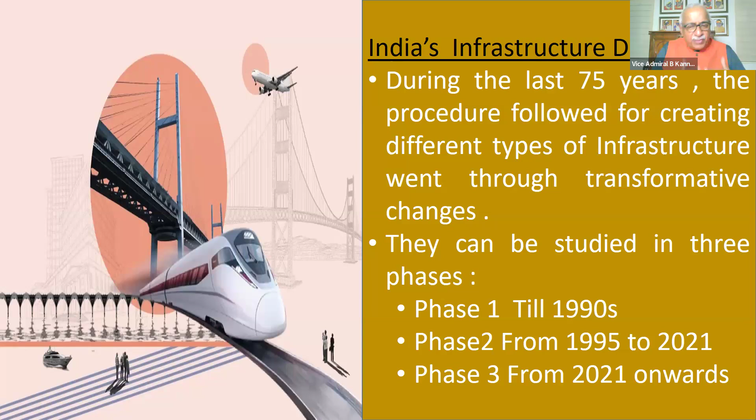So let us look at phase 1. In phase 1, the planning and execution was by the parent ministry.

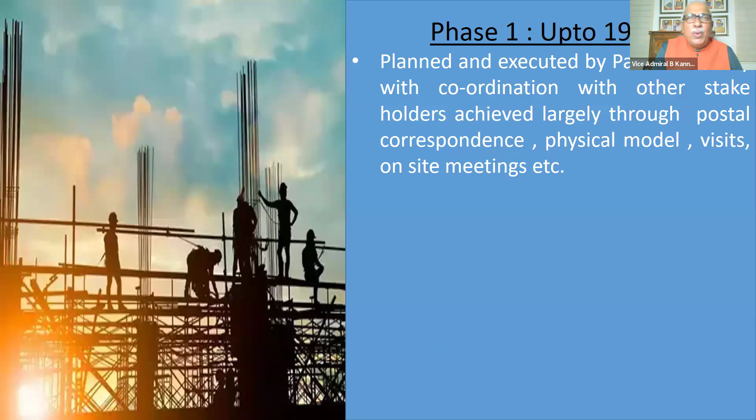If you are looking at, let's say, an energy plant or a thermal power plant that has to be created, it was always done by the Ministry of Power along with associated stakeholders. All the exchange, project progress, project updates, and even various clarifications were largely through postal correspondence. Physical models were made to explain what was going to be created, and people used to go to the site and take meetings. The technology of those days, before the mid-90s, did not permit fast interaction between the project site management and the main ministry running it. It had its own inertia, not because of the people, but because the system did not permit fast execution.

This disadvantage often led to delays in execution of projects, because you'd be seeking a clarification, maybe design related. Very often for design, you'd approach a foreign consultant, write to him, and his reply comes saying he will visit the place and then clarify. So delays kept accumulating in this era of infrastructure, and therefore there was time overrun. And when you have time overrun, automatically you'll have cost overrun.

As I told you, design talent was also limited in the country in most sectors, so we had to take help from foreign countries, foreign nationals, or foreign laboratories to help us with infrastructure design. So in this phase one, we had a centralized way of control, but the control was subject to a lot of delays because technology was not really supporting speedy exchange of information and clarifications, and therefore it largely depended upon visits of people coming all the way to the site to give clarification.

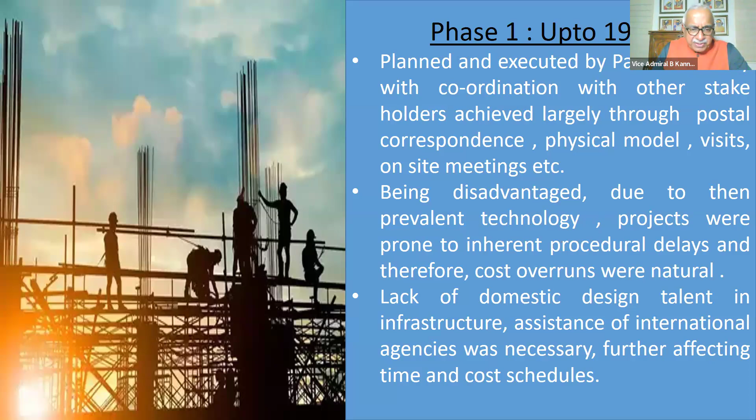Let us look at phase two, between 1995 and 2021. During this period there was a change. The government formed a new department called DPIIT. They said for promotion of industry, and because industry is going to promote manufacturing mostly, there'll be new goods, then internal trade will also flourish.

They created a department for promotion of industry and internal trade, which looked at, let's say, we were importing a particular commodity from abroad, such as a medicine, and we want to look at how we can make this medicine in the country. We'll study whether raw materials are available, facilities available, any new technology required, and then decide to create a facility in India, whether it's a public facility in a PSU or a private facility jointly - though in those days joint public-private was not there much - or give some loan to a private company to create a facility.

This DPIIT used to form clusters of various groups, be it for power generation, pharmaceuticals, agriculture, electronics, etc., and examined whether any new technologies were emerging and how they could have a balance between industry and trade. If your industries are going to make goods, they have to get sold, either exported or domestic. So they also used to assess whether there is a demand for an item, and if you make it, how will you consume it within the country or export it. Along with that, they also looked at what quality level of production would take place so that the goods meet export standards and also create demand within the country.

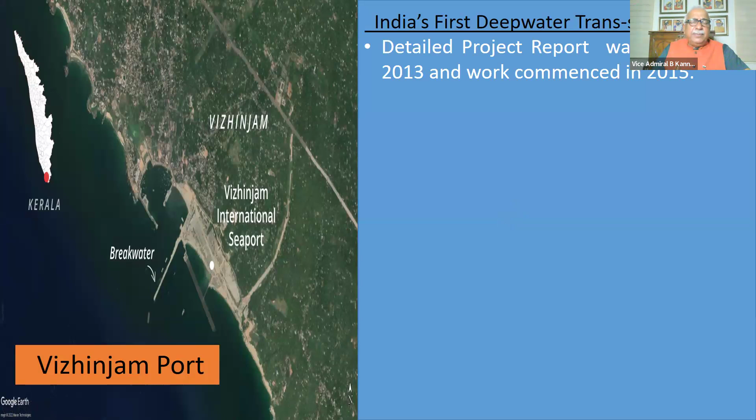This Vizhinjam Port has already started functioning from last year onwards. Its project report was prepared in 2013 and work commenced in 2015. About 20,000 crores are going to be invested in this. At the moment, only 11,000 or 11,500 crores have been invested. But more investment is going to come between the Kerala government and the contractor Adani, who will set up a full-fledged port in 4 phases. Phase 1 is over, and therefore functioning has started.

They will complete phases 2, 3, 4, and create a Vizhinjam International Seaport, which will be owned by the Kerala government but operated by Adani. This model is called the landlord model. Kerala government, which would have invested close to 9,500 crores at that time, will allow Adani Port to operate, and the profit made will be partly given to the state government, which will be the inflow for the state government. So this is the contract which has been finalized, and work is progressing.

While we set up the port, two important things came to notice. The road connectivity to the port was missed out, and the rail connectivity of the port has not got ready. Now it is expected by 2028. So for 4 years, because the port started in '24, till 2028, road and rail connectivity will be poor. There will be some small road, but a road which can take the type of incoming cargo as well as various goods for export will find it difficult to handle the scale of goods which are to move.

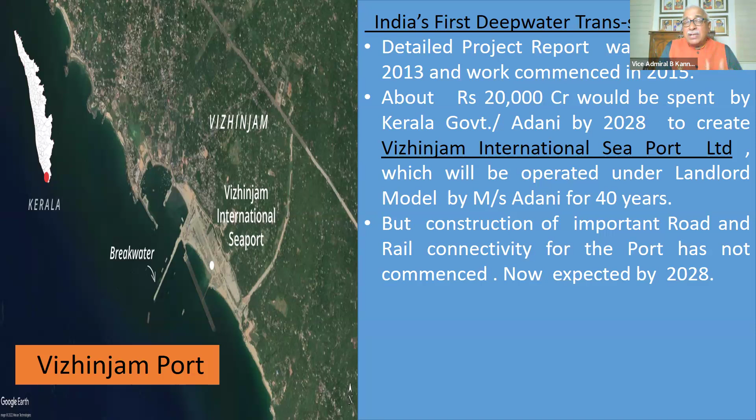We can go into details during the question and answer session. But it has impinged upon efficient functioning of the port, which was expected to take away a lot of business from Colombo, Dubai, and even Singapore, because Vizhinjam is very close to the international shipping lane. Now that is going to take some time to happen because of this handicap which we have.

But what I want to highlight is, how was this project monitored? What model was followed? How did they miss out this issue? Maybe it came to public notice very late, but the fact is many other things got finalized without taking first mile and last mile connectivity into account. Some other road got built, but that road was very far away from the port. The railway line, which has to get connected to this, has to be a tunnel to come to the port. So there are many issues pertaining to rail connectivity and road connectivity.

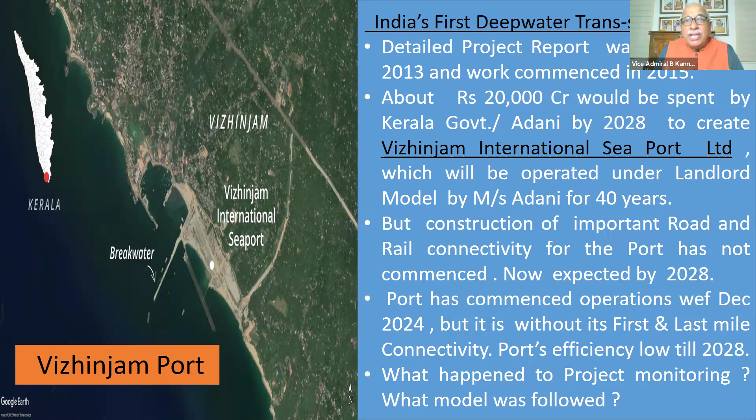This is an example of how an infrastructure project, which was very well conceived and much talked about, finally resulted in a suboptimal efficient infrastructure. It is still not there. It will take another 4 years more. We'll discuss more during Q&A.

So now I come to the last phase, phase 3, which started on 15th of August, 2021. The Prime Minister announced Gati Shakti on 15th of August during his Independence Day speech, saying we are going to have a new digital portal which will enable our infrastructure to be planned and executed well. The cabinet approved it on 21st October, a few months later. This Gati Shakti portal was expected to give seamless and efficient connectivity for movement of people, goods, and services. How that will happen, I will explain as we go along.

It minimized duplication in new infrastructure. At the same time, existing ones are not blocked. So they found ways and means of augmenting existing facilities. At the same time, anything which has been built, we didn't duplicate it, so that there is high utilization of whatever money you're putting in.

The logistics sector will be specifically addressed because that is critical to exports. Digital technologies will be used for planning and execution of the projects. So Gati Shakti, a digital portal, was created with these aims, most important being it will enable you to plan your infrastructure in great detail using digital technologies for planning, execution, and monitoring.

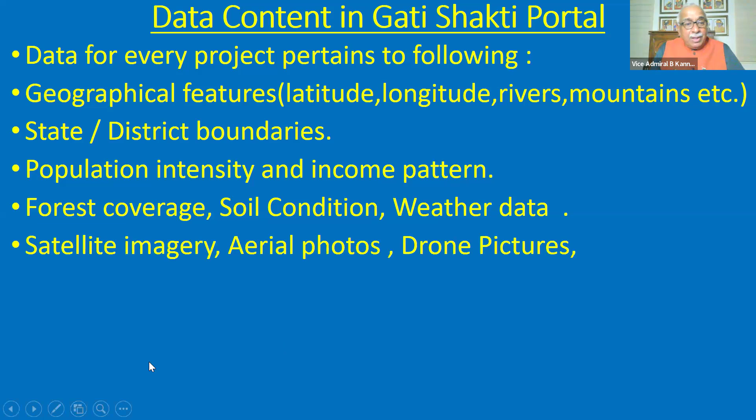It will tell you how much forest coverage is there in that particular area, what is the soil condition, is it subject to any sort of erosion from rivers, what is the weather data - is it having too much rain or very little rain? What is the satellite imagery of that place over the years, how it has changed? What are the aerial photographs which have been taken? Drone pictures - all these are data.

So for every project - let us say you're going to start a medical college in a particular area, maybe with a hospital also - then all these details are available to you in the form of data: satellite imagery, aerial photos, drone pictures. What is the location of post offices in that area, hospitals, schools, hostels, tourist spots - all these are available in the map.

And they are not in one map. They are different maps - there's one map for population density, another for satellite imagery, a third for aerial photo, a fourth on drone pictures, but they can be superimposed on one another. I'll show you an example.

And what are the natural disasters which have taken place before, and what are the management centers for disaster. So various types of data are collected, and this data is collected in geo information, geographical information as it exists on Earth, latitude, longitude. It is seen with respect to latitude, longitude, and maps are prepared in layers of layers.

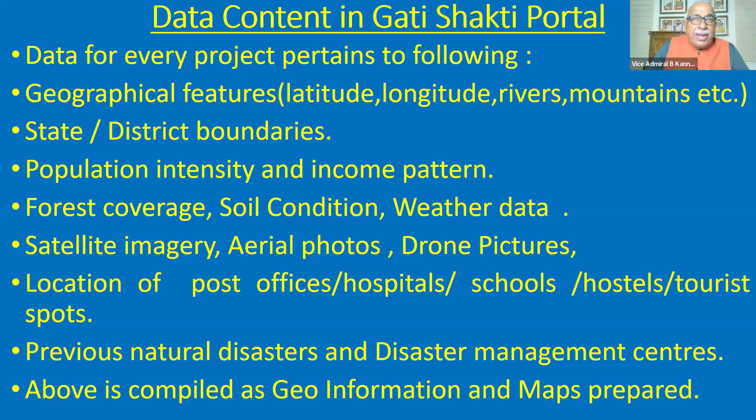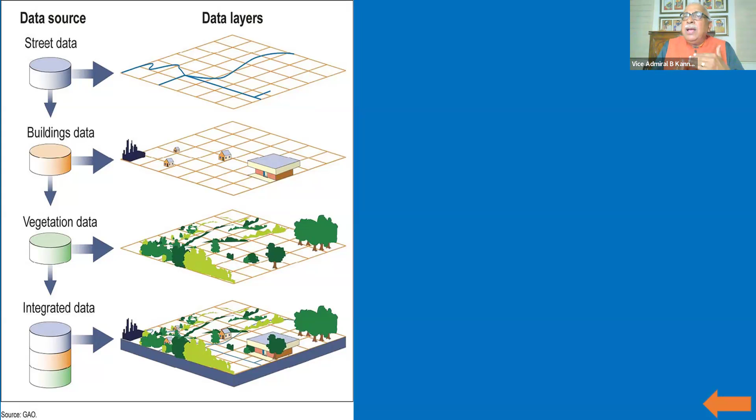So it is possible for planners to seek the various data available which they think is relevant to that particular project, and then say show this map, superimpose on this, show the next map. So they are able to visualize on the computer screen, huge computer screens, the entire layout completely in different data packages - seeing it separately and also integrated. So you're able to appreciate what is the exact impact on the ground.

So these maps are dynamic maps. They are interactive - you can ask questions to the map regarding, let us say, vegetation. How much is the forest cover in this area? How many trees will have to be cut if I have to set up the medical college and the hospital here?

The computer will straight away say, in this area, you will have to remove so many trees. Immediately, the answer will come from the map. These maps are interactive, prepared in GIS, Geo Information System. Latitude, longitude, all aspects are referred to as they exist on Earth's surface, captured either through satellite, drone, aerial photography, or from existing maps. Everything is available at the click of a button on your computer.

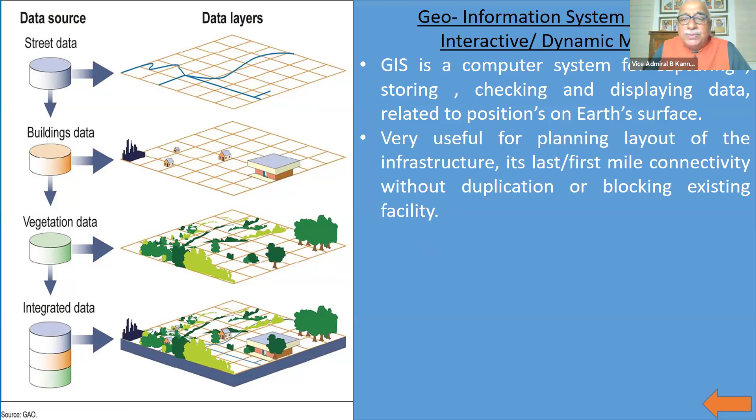So you're able to check it and verify it, and decide a layout of the infrastructure much faster than when you work only with maps on paper. You're able to do a better layout, give more efficiency, and talk about better management of solar energy or ventilation, as well as lighting inside the building.

Should we go for a green building or not? All these things you're able to finalize, and look at what is the first mile and last mile connectivity, making the plan more realistic and appropriate to the needs of the user and the owner, which I mentioned earlier. These are two important figures in every infrastructure - user and owner. We're able to meet their requirements.

We are able to look at, let's say, a stadium - how much area will be covered, how much seating, how much parking area. We've seen so many stadiums built in the country, and when it comes to parking, you've always suffered. So you look at if the seating is going to be so much, how will the parking be, how will the entry be, how will the exit of people be, including during an emergency if evacuation is required, and what will be the arrangement for entry for players safely and separately. So you look into all these aspects when you finalize a huge stadium.

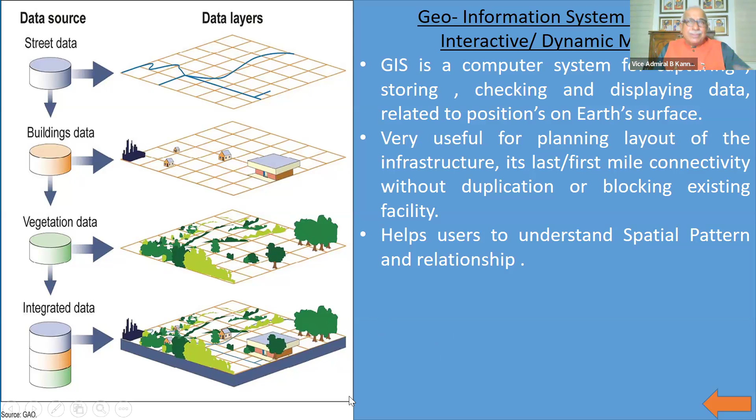And then you look at how it will be protected during rain and from the sun, etc. So I'm just giving an example of how different types of maps help if you're in the deciding team.

You can show me the map of how temperatures are in this place during summer. The map will come with different colors - if it is red, it means very hot; if it is pinkish, it is less heat, etc. The map will tell you the temperature during summer and winter, how much the rainfall is, and the layout of the roads. One has to see GIS maps where you can superimpose one on another.

An important aspect is that the symbology has been kept the same in all the maps. That means if you are depicting a road, it'll be a particular color. If the road is 4-lane, it will have a particular indication; if it is 6-lane, another indication. The color and symbols used will be the same throughout all the maps so that the viewer doesn't get confused.

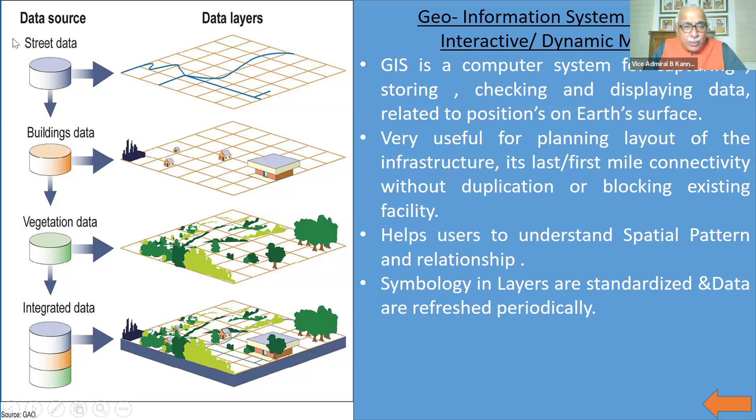Now I'll tell you how many layers of maps there are. I've shown you 1, 2, 3 and integrated. 1,685 data layers have been created with the help of various ministries, various institutions, ISRO, defense for aerial photography, and so many other institutions.

1,685 data layers have been created in Gati Shakti, out of which - I'm sorry - 720 odd has come from central government, and 950 has come from state governments and union territories. State governments had a lot of information on regular paper maps, which may have been scanned, but now they have been brought into a common symbology, common GIS, and uploaded on Gati Shakti. So when you look at a particular site within India, the data from the state is already there in the memory, along with data from the central government and various ministries, allowing you to create a very holistic picture from all the data.

All 1,600 may not be required for one project. For one project, some 50 or 60 will be required. For another project, if you're looking at a new airport, you will be asking to show the wind pattern during summer, winter, or monsoon. There'll be another map which you may not consider for planning, let's say, a school or a hospital - may consider, may not consider.

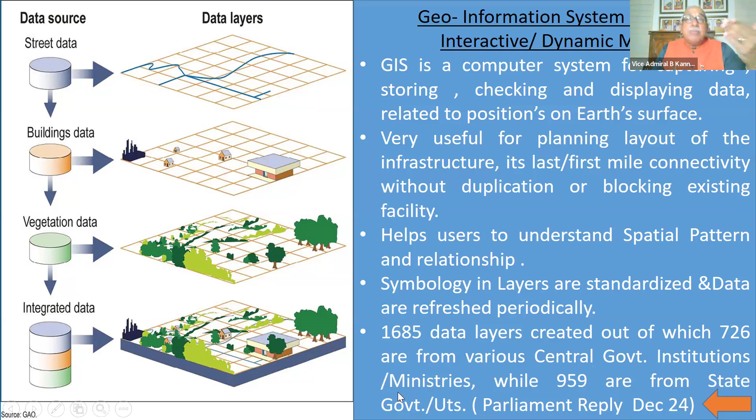1,685 data layers have been created as of now. This is a Parliament reply from December 2024. I'm very sure the answer is extremely accurate - it could be more now, but since December 2024, some more data layers would have been created.

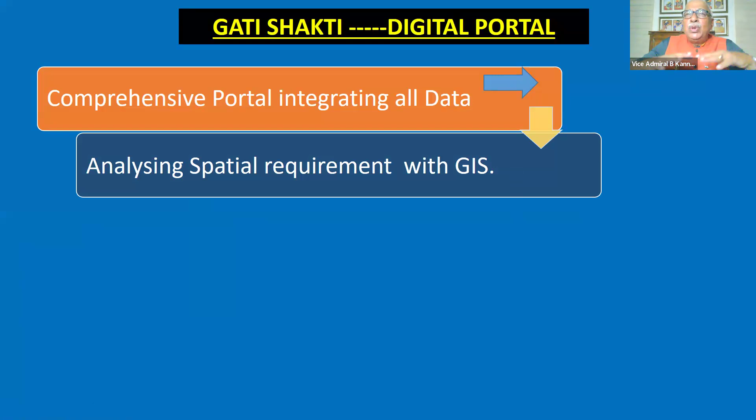Now, with all this requirement which has come from various data layers, you get a good idea of the spatial requirement of the project, vis-a-vis what is available. And you're able to visualize the project in the GIS domain.

You may have 2-3 options. We'll have the hospital like this with extension like this, or somebody may say hospital like this, extension in the south direction, somebody may say west direction. So you select which is the best solution. All this is the planning stage.

And once you have selected, then you evolve the timelines of the project. Yes, we will take 3 years to build it, 5 years to build it, along with cost aspects, of course. And once you have finalized the project and decided and sanctioned it along with so much of cost, then you're able to monitor the progress by the various changes which are happening in the data layers.

Satellite imagery will tell you the changes. Aerial photograph will tell you the changes. Drone photographs will tell you the changes. So all these are integrated. So sitting in the main office of the ministry, be it state government or central government, you are able to look at how the project is progressing, right?

I wish this was in place when Vizhinjam was done. It was not a part of Gati Shakti project portal. Someone perhaps decided road and rail connectivity can come a little later.

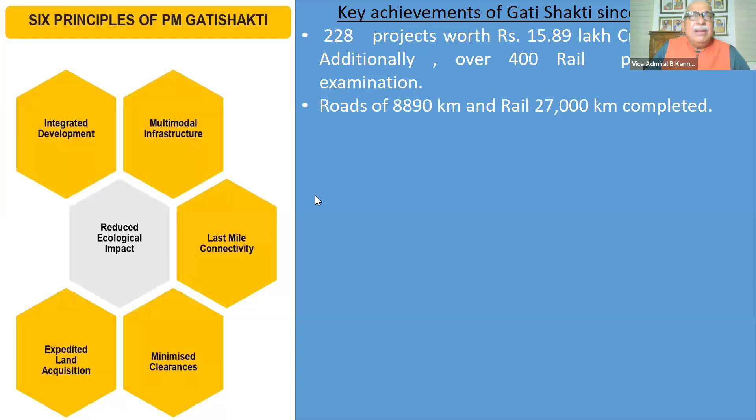So let us look at the output which has been done. Over 220 odd projects have been done by Gati Shakti, corresponding to nearly 16 lakh crores of rupees. In addition, they are doing 400 rail projects now, which is under examination. They have made projects for nearly 9,000 kilometers of road and 27,000 kilometers of railway line, which they have already completed - meaning they have finished finalizing the project, projects have got sanctioned and are under execution.

Underground pipes for sending crude oil. Crude oil comes by ships to India. Sometimes it goes directly to a refinery, like in Jamnagar, Cochin, or Bombay. But there are refineries in other parts of India where the crude has to go by underground pipelines or by trucks. But how to lay the underground pipes? What route to follow?

66% of the oil pipelines which have been recently planned have been done through Gati Shakti, and almost all natural gas pipelines. You have seen natural gas pipelines being laid in Cochin between the terminal in Udyog Mandal, as well as where the gas depressurization plant is, and all that layout of underground pipes has been done through Gati Shakti.

Look at the advantage. We have seen in many cases, especially with BSNL, fiber optic cables get cut. When road development happens and they dig something or make a cut across the road, they break a fiber optic line because it was laid but never got absorbed into digital drawings which somebody else could refer to and decide upon. It perhaps remained in a paper drawing in a cupboard in the BSNL office.

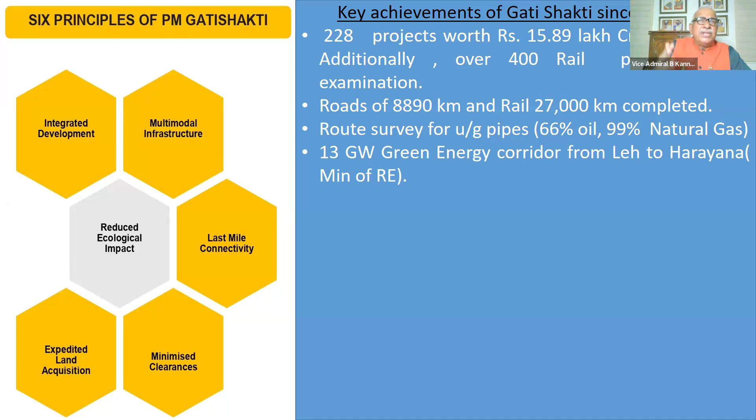13 gigawatt of green energy which has come from Leh to Haryana - because it's a mountainous region, how they will have this transmission line running from that hill to this side and through the valley, then it will come to Haryana finally - was finalized using the 3D maps available in Gati Shakti.

Disaster management for the Amona River in Goa has been finalized based on this. I'm giving a few examples. New schools in Uttar Pradesh - the location has been decided by Gati Shakti, because, as I told you earlier, you have a data layer called population density. So you know how much population stays in which places in the district, what is the intensity, and based on that you can decide upon the school location so that last mile connectivity is most favorable to the user, the general public.

There's a coastal corridor which has been created in Gujarat for speedy movement of trucks and goods. This has been planned using Gati Shakti. New healthcare facilities in internet shadow regions have been created.

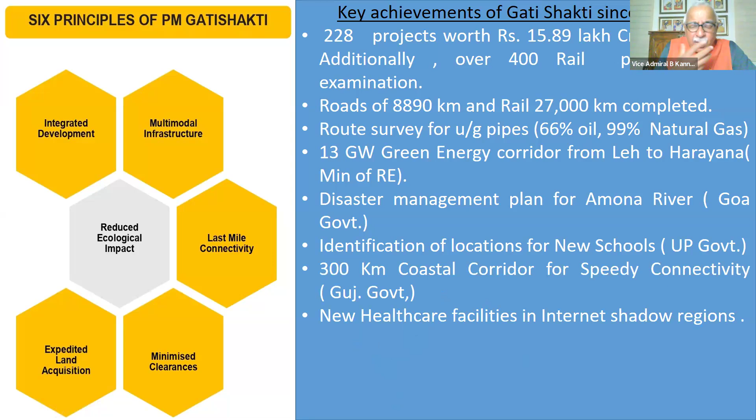Now, this has been a new problem, because for PM's Ayushman Bharat service, one of the facilities available to the citizen was he could do video conferencing from the village to the doctor, who could be in the nearest town or nearest big hospital, which the village health center would arrange. Now that video conferencing, of course, required internet connectivity. So there used to be internet shadow regions in India in many rural areas, which is one of the data layers.

The location of 4G towers of BSNL and 5G towers of Jio, BSNL etc. have been finalized through Gati Shakti. So if you have a requirement of internet shadow to be assessed, it's possible for you to use the Gati Shakti data layer of how good the internet coverage is in India.

Is it good? Which are the weak areas? Which are the shadow areas? Why is there a shadow? There could be a tower here, there could be a hill here. So on the other side, you're not able to get line-of-sight connectivity or point-to-point connectivity. So they were able to identify the location of various towers of BSNL.

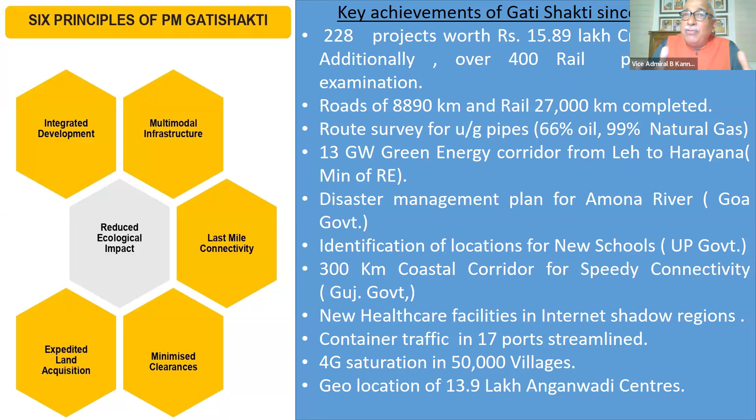This is one of the projects which have been cleared by Gati Shakti in the last 2.5 to 3 years. Gati Shakti has been actually a fusion of technology and governance. Good governance means you should be able to make sure the services reach the citizen efficiently and effectively.

Now, if you're able to use technology in making sure you plan the infrastructure well, execute it speedily, and deliver the service to the citizen, then you're taking the benefit of technology and ensuring the governance is good. So Gati Shakti has been able to fuse technology and governance through all these data portals which I talked about.

Some of the future projects of Gati Shakti are to make it district-wise. Till now it has been only state-wise, like Kerala state and what all projects will come there. Now they are planning to go district-wise because when working with the state, the state was expected to further sensitize the districts for various aspects.

Now they found that if it is district-wise, the user in the district gets involved with the project better. So this is planned to be done. It has already started with 27 aspirational districts, and I'm sure you know what an aspirational district is - otherwise I'll answer in Q&A. It started from December 24, and 27 districts are already doing a trial run, to see how it will be for Gati Shakti if districts are also made a node able to interact in a particular project.

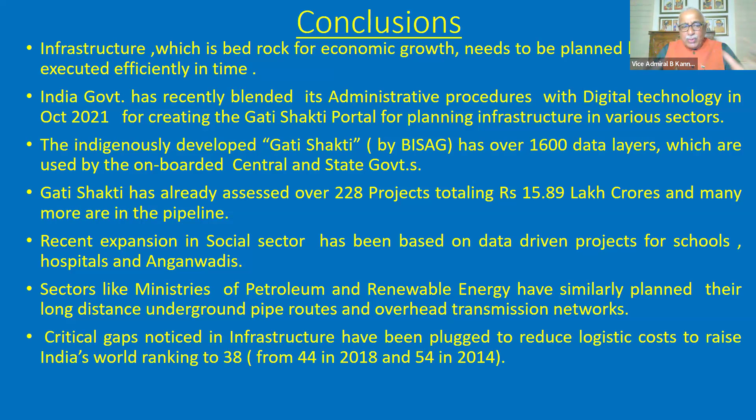Gaps have been plugged in the infrastructure to reduce logistic costs, which was 54 in 2014. It came down to 44 in 2018. Now we are at 38. We are looking at coming down to 25 by 2030.

With India's GDP target going to $7 trillion by 2030, and I'm very sure it will be achieved even much before that, Gati Shakti would have played a very, very crucial enabling role in creating cost-effective, speedy infrastructure for the country. And as I told you earlier, infrastructure is the bedrock for economic growth.